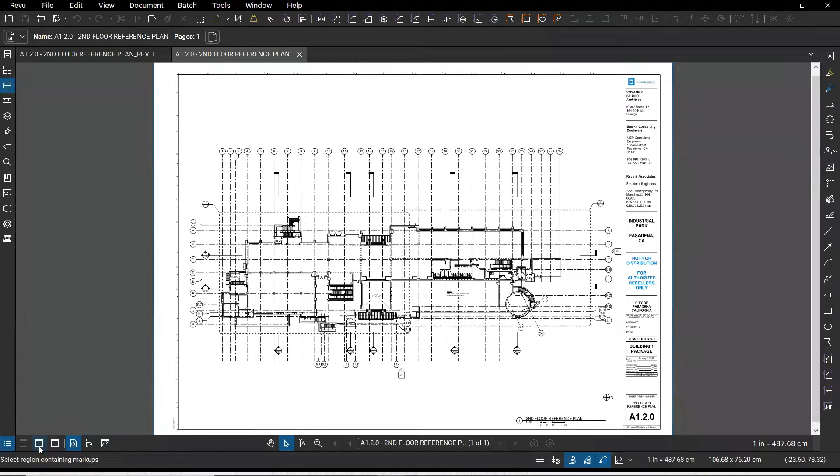If I go to view, you'll also see split vertical here, with the corresponding hotkey. As soon as I hit that, it'll put them on two separate screens, splitting the view. You can see here I'm actually on the same drawing in each one, so of course I'd want to use that tab so I'm looking at the two different drawings.

Now as I go around, I can do a bit of a comparison, but the best thing to do is make sure you synchronize the views. That way, when I change on one view, the other drawing will follow it. So there's synchronized view here, and if you have up your status bar, you may also see that command as well.

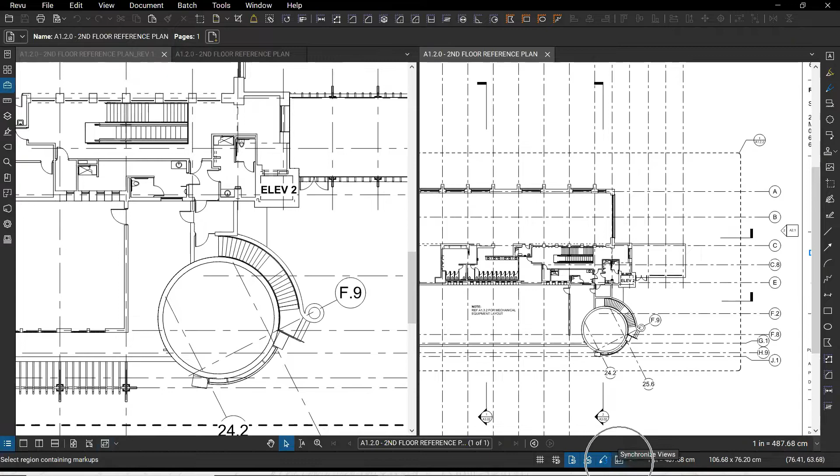Again, it's under the view tab, called synchronize views. Now wherever I zoom to on this screen, it takes me to that corresponding location. You can see how as I go around it's taking me to those same positions. I can see, for instance, I've got a door here where the original didn't have that door, so I can see some simple changes already.

I can come down and see that this one has the facade on it, where this one doesn't as well. So I can do that real simple comparison straight away. It's really good to do if you've obviously got a new update of a new drawing.

I'm going to close that window just by closing that, and I can actually overlay this. Now, the best way to talk about overlay is I like to compare it to when I was in the drafting office, where we used to have a light table, or you'd even occasionally hold two drawings up against a bright sunny window if they were the same but different revisions. I can get the computer to do that.

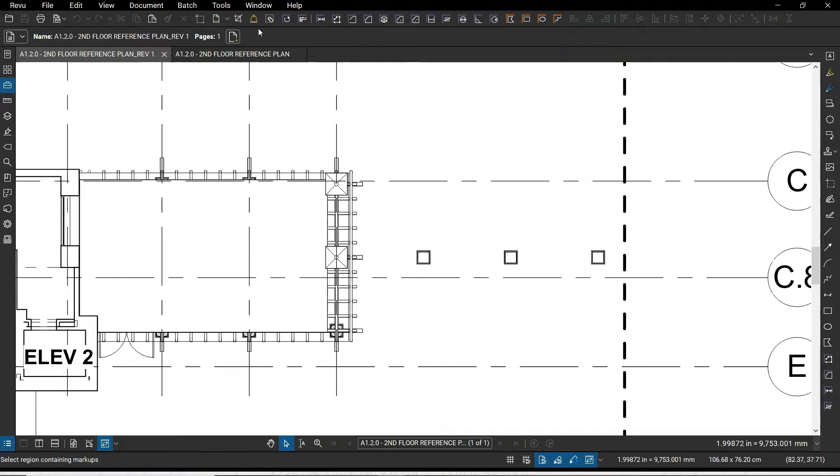So under the document tab - sorry, under the tools, no, let's go to - yeah, it was under document. So remember, whenever you're trying to do stuff to the document, it's under the document tab. If you're trying to do things with the view, it's under view.

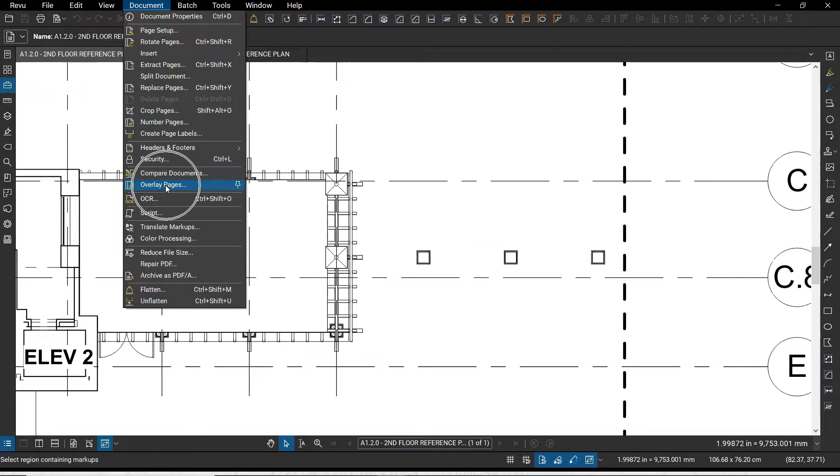So under document, you can see here I have overlay pages, so I can overlay those pages. You can see how it's going to put one drawing as red and the other one as green.

What I can do as well, if I didn't have the other file open, or even had a third revision I wanted to add in, I can add another file here. You can see that it's already sort of added the open file - that's what I always like to do, open them prior, so it's pre-populated that.

If I hit add here, I can go find another drawing, which I won't. I can modify these as well - change the color, opacity, or make a new layer, etc. Generally, this is all okay out of the box - you don't need to do it otherwise.

What you can do is compare regions of documents. So if you just have a little detail that's been updated, you can select a region and just overlay those two regions. Again, I don't really need to play with any of these settings.

Align points here - this is where if you had two drawings of a different size, say one printed on A3 and one on an A1 sheet, you can use align points to select three different points, which correspond, then pick the three identical points on the other drawing, allowing it to scale and overlay them. Quite a useful tool, especially if you're trying to just do one little corner detail rather than a whole drawing.

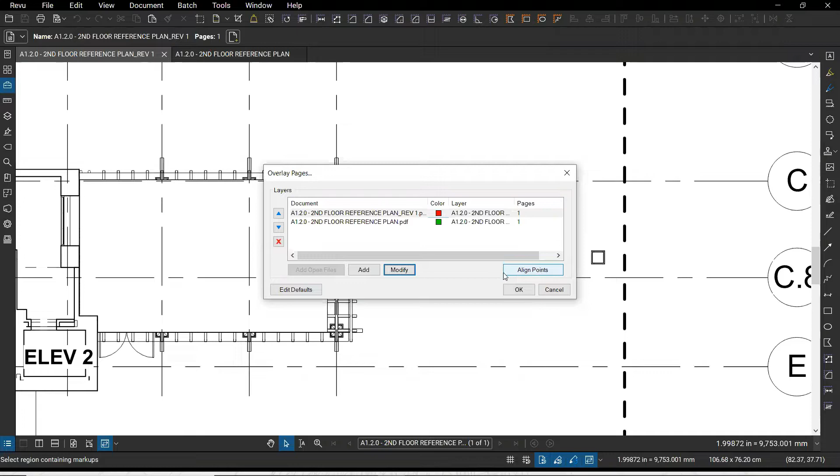I'm just going to hit OK. You'll see it creates a new drawing overlay, giving one the green color and one the red color. When both of them are together, you get pretty much a black, dark brownish color, so you can see everything that's the same.

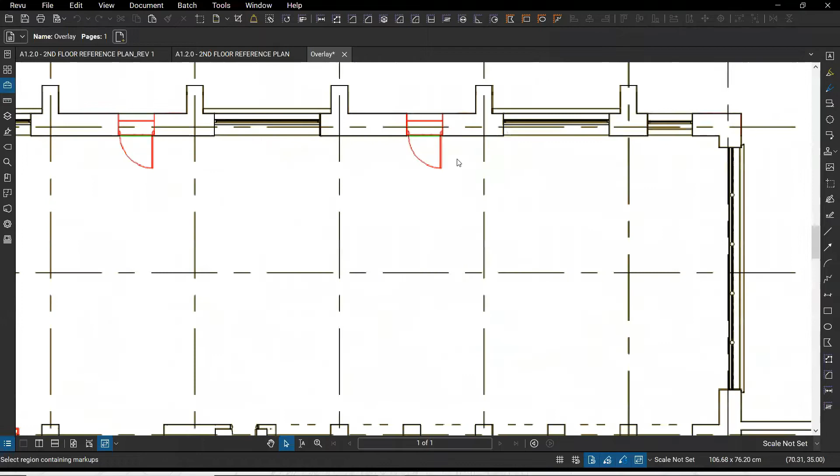You can see that door change straight away, and that facade I pointed out. I probably would have missed things like this door here, maybe this new wall, this mechanical penetration, etc. So you can see how it's very useful - all this steel framing at the front here was all additional on the second drawing as well.

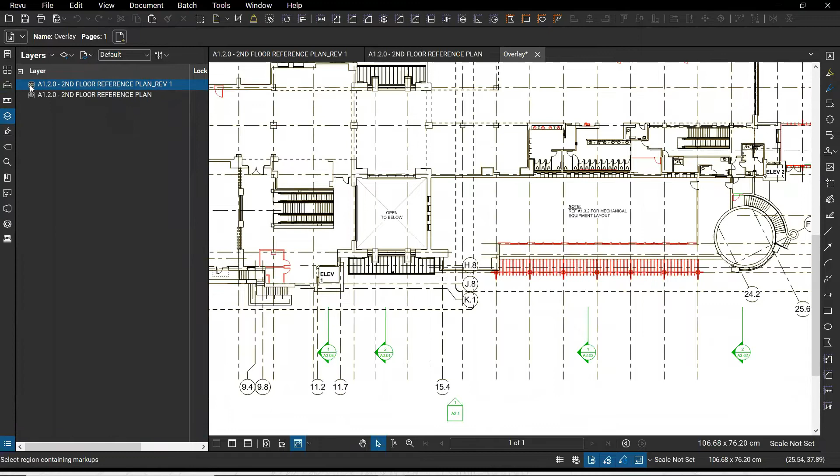Now it has created layers in that drawing. So if you go to your layers on the drawing panel, you can see that it's allocated a layer to each drawing. I can turn these layers on and off. So if I did just want to see the original plan, I can turn that off, which will highlight the first drawing, and do the opposite as well, getting the red drawing. So it's quite easy to see what's new and what's not. It's great if you get two different drawings from your consultants, clients, etc.

Makes it real easy. That's an overlay that can be saved as a file, and you can save it and send it as an overlay as well. I'm going to close that down.

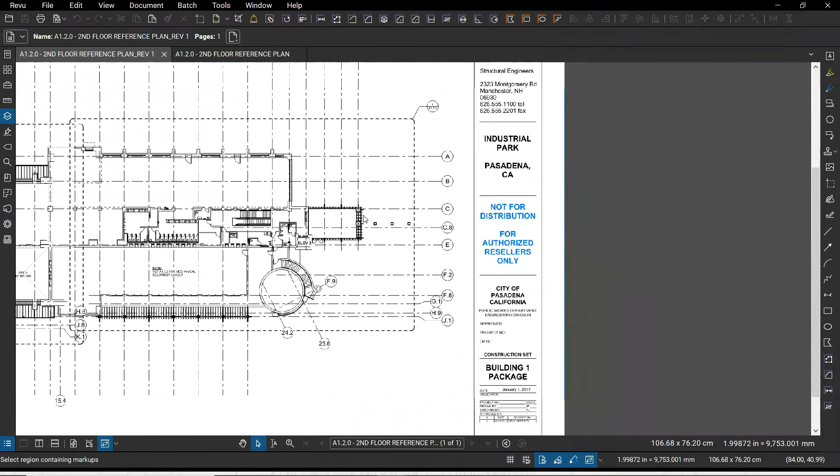There is another method we can use. We can use what's called a comparison. The comparison really uses the power of Bluebeam Revu to go through and actually highlight those changes. So I'm going to go back under our document tab, and you can see overlay here as well—we just did overlay. I'm going to do compare.

So we can do a comparison. Again, you can see because I've got those two drawings open, it has automatically populated document A, which is the revision, and document B, which is the older one. I'd like to make a note here that document A, revision 1, is the later document. I could use this manual alignment if the drawings didn't line up exactly, or if I wanted to just do a part of the drawing.

There are some comparison tools in here. Generally you play with these, you get a feel for what works for one project may not work best for another. You may need to play around to find the right settings for your particular project. You can do printed documents, the same printer, different printer, or scan documents. What these do is change these advanced settings to adjust the accuracy. As I change the comparison type, you can see things like the color sensitivity moving around a bit to give you the optimal result.

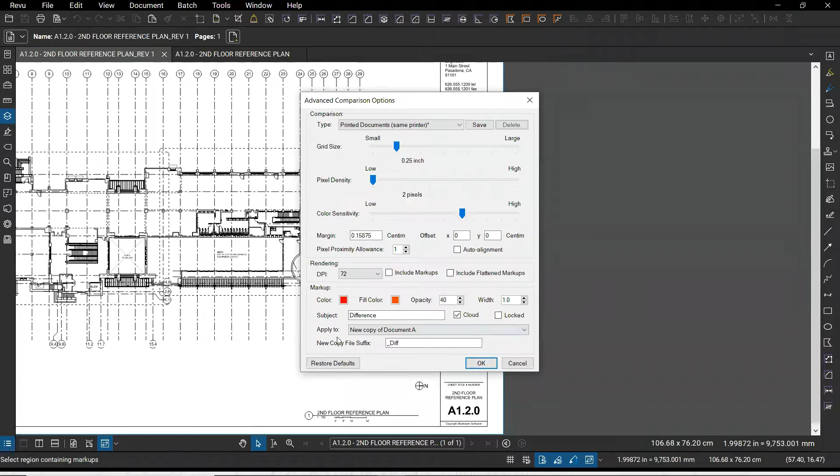I could flip these around, and like I said before, if I needed to point to a new document, I can use these three dots here to jump to another document if needed. It's always best to have the documents you're trying to compare already open—I think that's the best method to use. Hit OK.

We'll compare the documents. You can see it's actually activated that split view. I probably don't really need that, to be honest, so I can go back to one window by hitting this and going to unsplit.

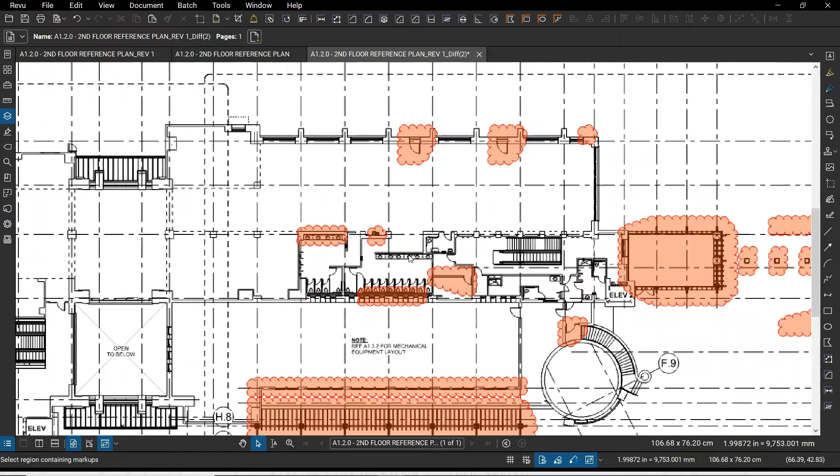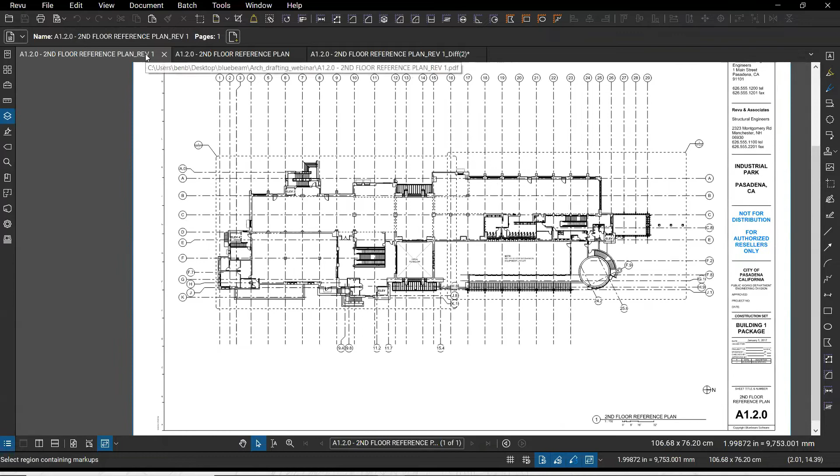You can see it's actually gone through and clouded the changes. Where the other method allocated a different color, this has gone through and clouded those changes. This is great if you've got a supplier or someone who sent you the latest revisions and hasn't clouded the drawings themselves. These are all the section marks—on the later one it didn't have the section marks, whereas the original drawing had all these section marks on it. Again, that's probably not a change as such, it's more just a drawing update, so it's not really relevant.

So I can simply select these clouds and go through and delete the ones that aren't really showing me a structural change to the drawings. I can delete out the clouds that aren't really part of the drawing—well, they're part of the drawing, but not part of the building as such.

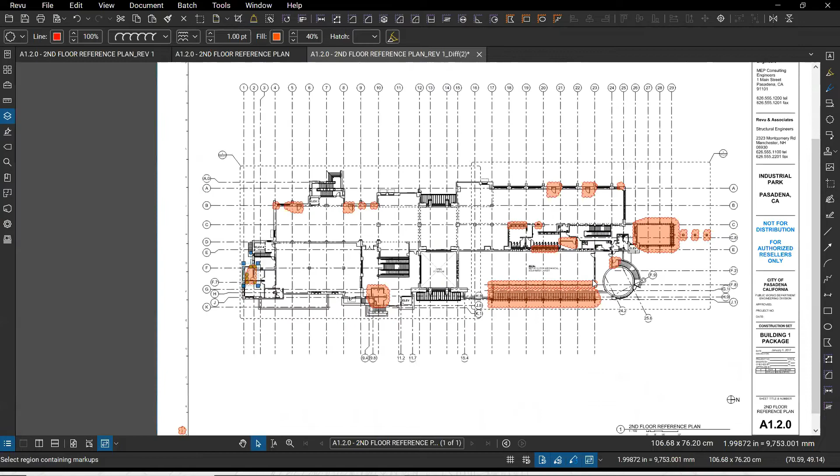So there you go, very quickly, I just fixed that up. I've got the drawing there with the differences. I can go through and make sure things like this door aren't going to get missed out on my variations, etc. It's quite clear what the changes are.

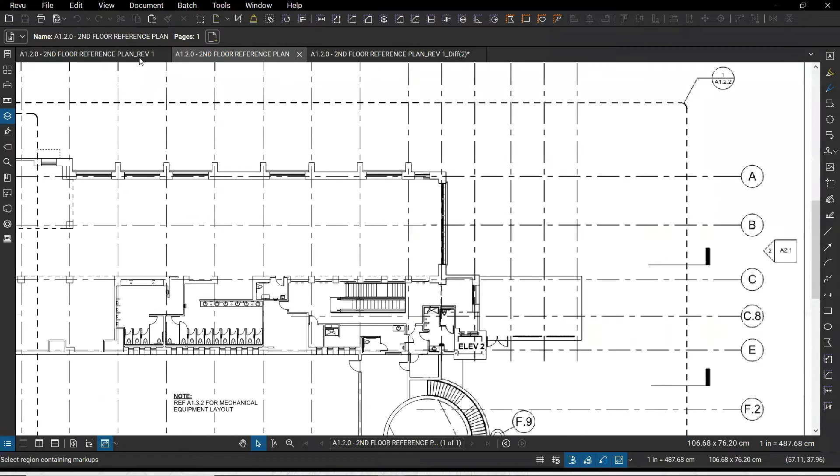Again, that sensitivity can be a little bit different. If I really looked at this corner here, you may find that there isn't a significant change. You can see on that one there, it looks sort of the same. And on this one, that line might have slightly changed, but it's actually not that big a change.

So again, I could probably delete that cloud out, for instance, and just have it on the major changes. So that's your comparison and overlay. Quite great features if you're really dealing with a lot of drawings. Again, you can save this as a separate PDF, etc., which I might do just in case someone asks a question and we want to go back to it.

So what I'm going to go through now is just the tool chest and profiles and how that works. You can see the tool chest here in my panel, and I've got sort of my tools set up. Got a few markups that I use here. I've also got some universal beams that I made up when we do sketch to scale, which I'm actually going to show today as well, how to set that up. And some flooring quantities, etc.

Now, this is a profile that I use quite commonly, but you may have someone who's just doing some estimating or doing drafting, etc. So we can change that profile and push that out to different people in our company just to make it more approachable. If someone's not going to use universal beams, it's probably not warranted to give them that in a tool set. So to change the persona, you can simply come under your Revu tab and go to the profiles.

Change to different ones or create a new one. You can see here that I've got one created for a client. And if I change that, you'll see that my tool chest will change and even all my toolbars change as well. So you can save the toolbars in it. You can see that it's changed the different profile and I've got a lot more tools that I sort of didn't have before. So this makes it very easy.

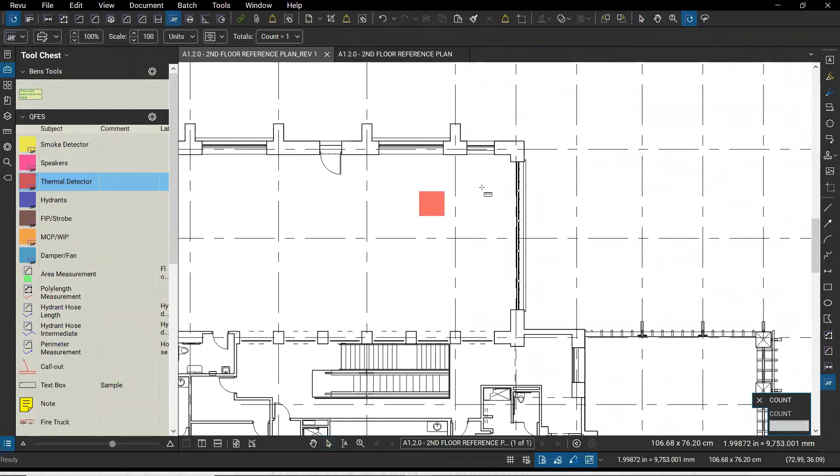If someone's doing like a fire thing, I can put on the thermal detectors, etc., just by dragging and dropping, and put all these quantities on to get my quantities out. So that's a different profile. I'm going to show you how to now make a tool chest and how to put an item into that tool chest. I will just flip back to my profile.

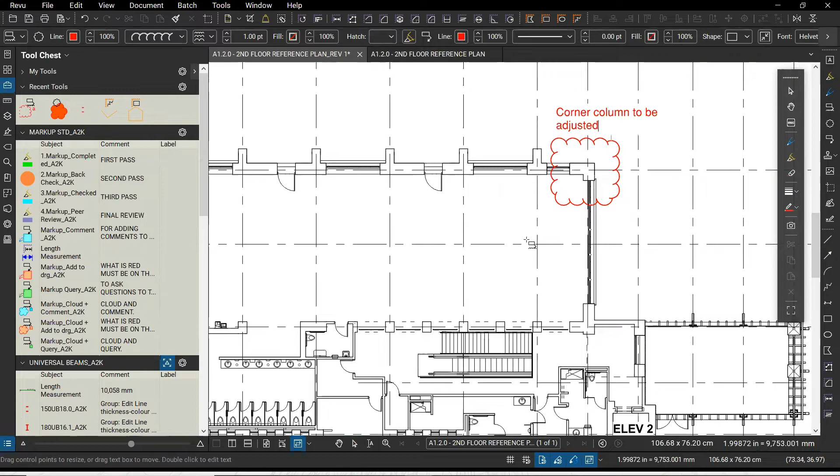And what I'm going to do is just a simple markup on this door here. So I'm not going to do the drafting yet, I'll just do a simple markup to keep it simple. Go to my tools and markup and just create a simple Cloud Plus. Cloud Plus is always a good one to use. I can do an area around that and it will also give me the call out as well here. And I can put corner column to be adjusted. Now, I can manipulate this and change all the settings in it.

So I generally like to use a bit of a fill on it, it stands out a bit nicer. I probably like to avoid red unless it's a real change, you know what I mean? So I might go to like a dark sort of bluish color. I'll do the same for the line as well, which I didn't match those colors exactly.

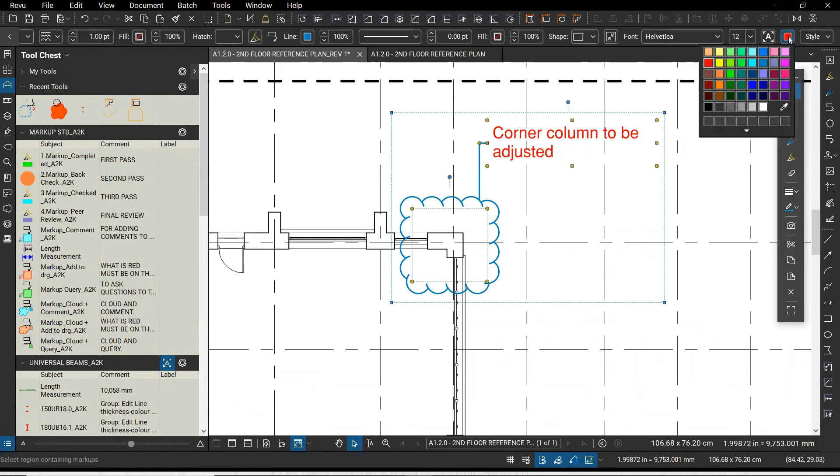And I can do the same with my text. So you'll see all these settings up here. These settings as well are all available under the properties. So if you go to properties here, you get all these same settings. It's generally, you get a bit more subtlety here. So it's a little bit easier to change in the properties, I suppose, rather than using the actual properties bar where you have to slide it across if there's a few things.

I generally like to put a fill on it as well, and always put a bit of a shade on that, like maybe 20%, which will really just make it pop a little bit better.

Now, if I wanted someone to use that same sort of markup, obviously I want to save that into a tool set so someone else can grab that straight away and do it. So first of all, I need to create a new tool set. If I go under the tools chest here, you'll see right down the bottom, I can manage my tool sets.

So I'm going to create a new tool set. I'm going to simply add a new one and give it a name. I'm just going to call this sketch to scale, so I can show how we can use this in a scale drawing as well.

I am creating a new one. You could path it to an existing one on your network, which you may want to share with other people, but I'm just going to create a new one from scratch. I do want to display it, but I don't need to show it in all profiles. I'm going to just add it into this one profile, as I described with the profiles. If you don't want everyone to use it, or it's not necessary for all your profiles to have it, I would not tick this - I'd leave it off by default.

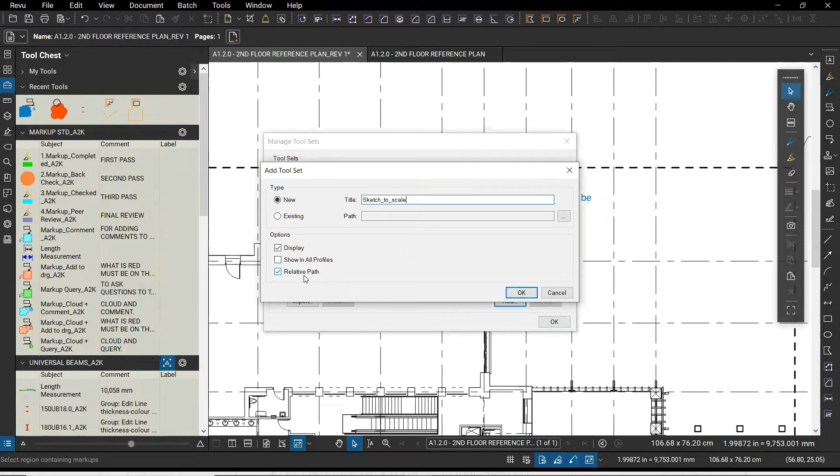Relative path just means if you send it to someone, it will find it easily because it's got the relative path. Hit OK, and this can save where you want it to save. I'm just going to save it in my roaming folder, where all my other ones go. Look at that, already exists - let's override it.

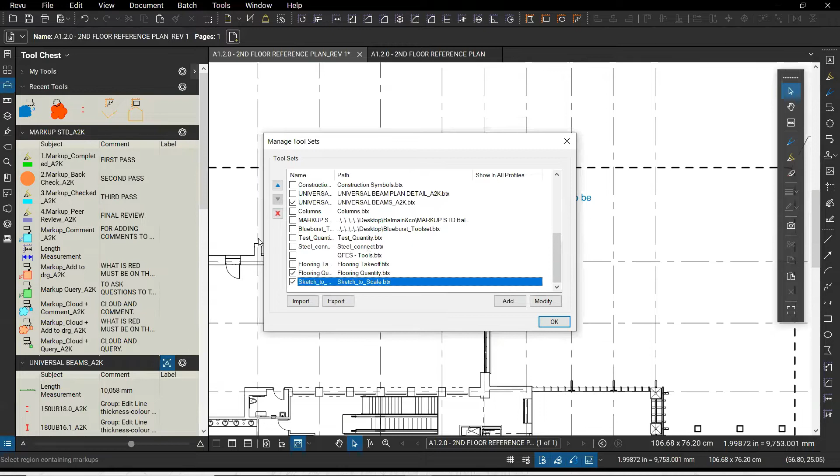You'll see now these tick boxes determine if it's displayed here in your current tool chest. So if I turned on my test markups, for instance, that would become available here. If I turn it off, it'll disappear. Whenever you create a new one, it will always sit at the bottom. You can move it up to the top just by hitting these arrows, and you'll see eventually it'll get up to where it's meant to be.

Hit OK. To add something into your tool chest is quite simple - there's generally three ways to do it. One mantra I have when working with Bluebeam a lot is: if in doubt, right click it out. So make sure that if you're wondering what to do, select it and hit right click, and that will give you generally all the options available for it. You can cut, copy, paste, format painter, change the colors, control points, etc.

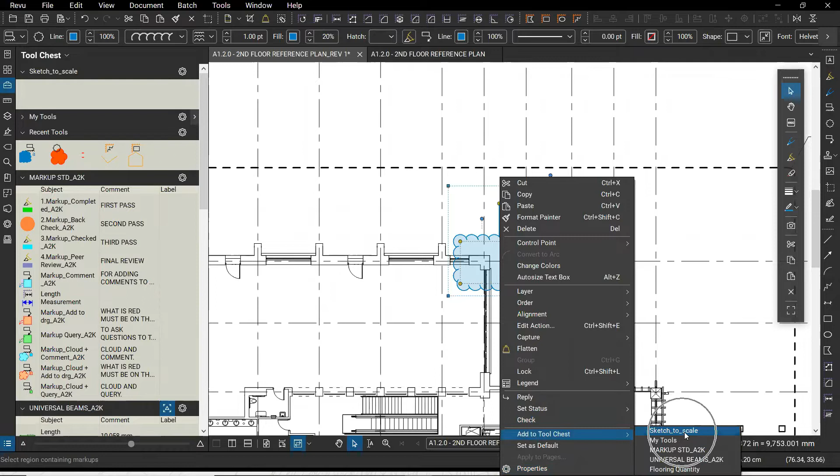You can also add it into a legend, etc. I do want to add it to my tool chest. You'll notice here, out of the multitude of tool chests I had available, it is only seeing the 4 or 5 that I actually have turned on - you can only add it to an open tool chest or tool set. Tool chest is the collection of tool sets. Add to tool chest, add it to my sketch to scale, and you'll see it jump in there.

I can also select it and go to the properties, and you'll see right down the bottom in the properties we have that same add to tool chest option. Again, I could select that same one here. The other way to add it in is that it will remember the last things you did, so you can see in recent tools I have the original cloud that we did during the overlay, and then I have my cloud plus that I just created.

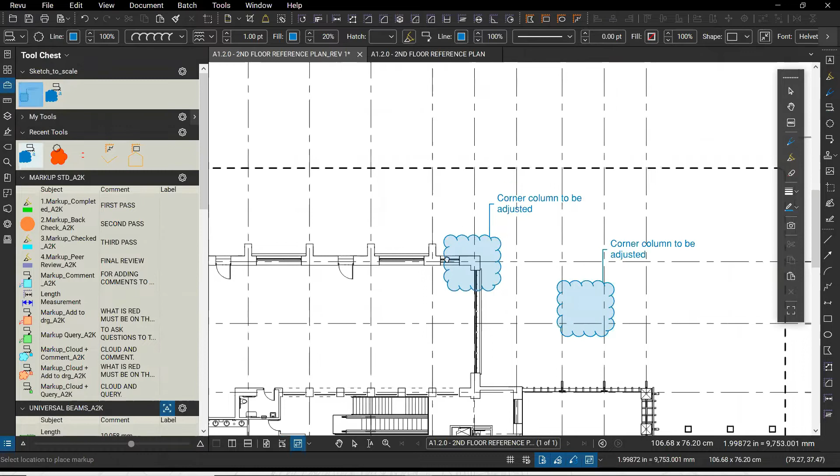So I can simply select it from my recent tools and drag and drop it into my sketch to scale. You'll notice here that the 2 icons are different even though it's the same thing - the original one is what we call drawings mode, and this is what we call properties mode. If I bring this one straight on, you'll see it's exactly the same. If I wanted it to look slightly different, I would need to activate the grips and drag this around to that new area, and then change the note accordingly.

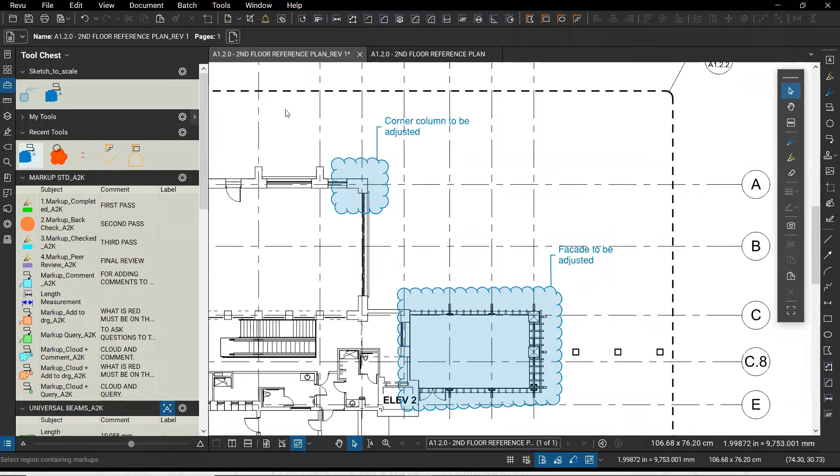You can see that still works. There's nothing really wrong with that. Some people don't mind having it like that. This is what we call properties mode, where it will grab the properties of that, but it won't be restricted to the size it was before.

If I select this one, I can select that whole circle area, and you can see how it's really putting it in from scratch. So, facade to be adjusted. You can see how straight away it's grabbed the properties of it, but hasn't grabbed the type of it.

So you can see they've gone in differently here. Those icons might be a bit small or a bit big. You can use this slider at the bottom to make them bigger or resize them as you like. I try to just keep it in the middle, but it's up to you.

To change them from drawings to properties mode, you can simply double click. If I double click on this icon here, it'll change to that one. And if I double click on this one, it'll change to what it was as well. So simply by double clicking, I can change it from drawings mode to properties mode or vice versa. Again, by right clicking, I can change it to drawing mode or properties mode from inside the tool chest.

There are also icon tool chests where these show more detail. Again, that is in the settings of that tool set. So I could change the settings to actually show detail rather than the symbol. If I change it to detail, you'll see how it gives those details.

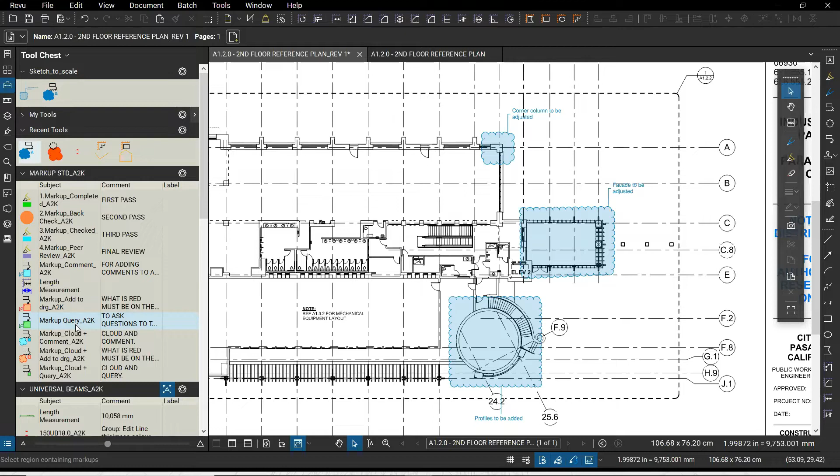Again, it's up to you. Some people don't mind the symbols, they know what they are, but I always find it's more useful to have a bit of a description in there. So that's quite important. The properties and drawings mode will really change the way you use Bluebeam if you weren't aware of that. So I'm going to go through sketch to scale and really show how that works.

I'm going to open up a different drawing. I do have it recently open. So if I go to file, I get all my recent documents here and I can open the one I wanted, which was this one. So this is a drawing here.

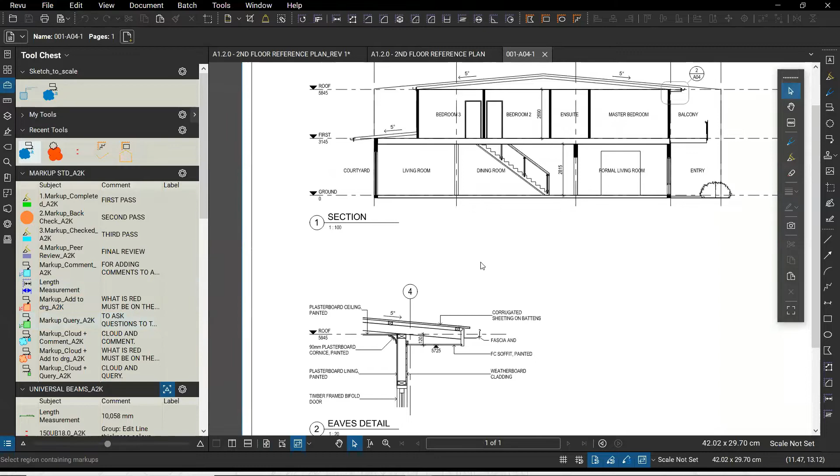Just one thing to note, the previous drawings I used did have a scale set. You can see how 1 measured inch would be 487 centimeters. This drawing, the one I've just opened, does not have a scale set. Scale is not set. The first thing you should always do is set the scale.

Whenever you go to do a distance, if you wanted to measure something off, as soon as I went to do a distance, it would come up and ask me straight away to set the scale. If you're only doing clouds, it's not going to ask you to set that scale. So we do need to set the scale before we do any drafting as such.

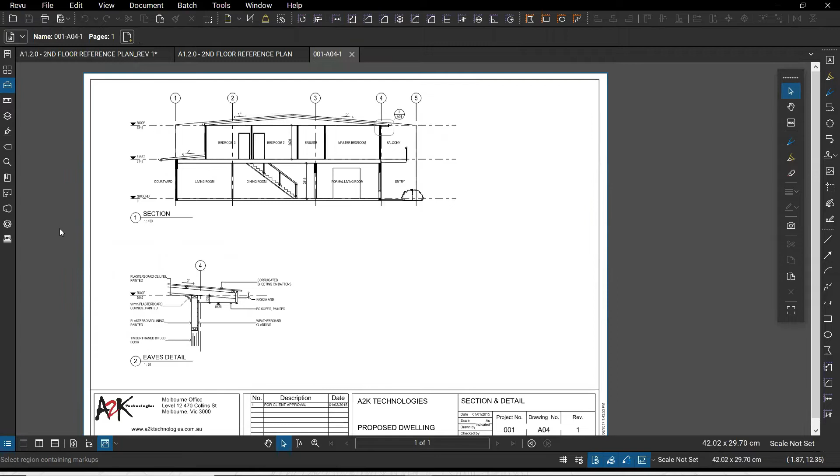The first thing I'm going to do is, you can do this under the measurements tab, under the measurements panel, or I can go under the tools tab and go to measure and set the scale here. You can see it does have the corresponding icons in my toolbar across the top.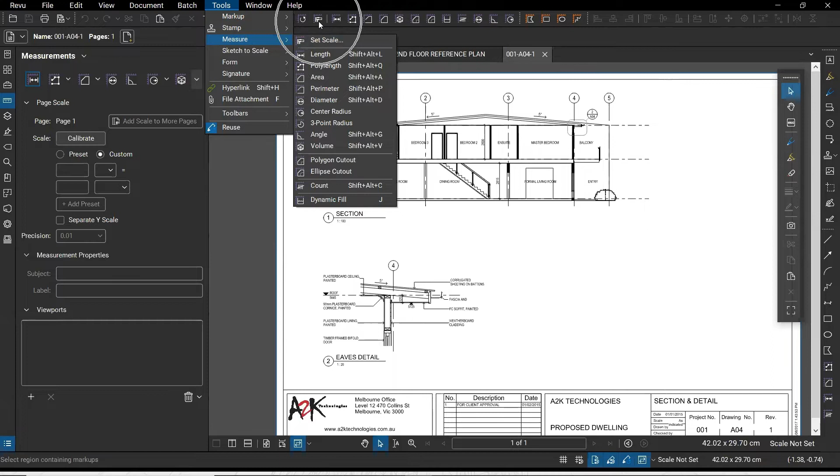I'm going to set the scale. So let's set the scale on the current document. Again, I can set that on pages, etc. Just use my presets and 1 to 100. This may not be the right scale. Occasionally you'll have A1 drawings sent through in an A3 format, so the scale may be a little bit off.

If that's the case, I recommend using the custom option and coming here to actually calibrate the drawing. When you use calibrate, it will ask you to select 2 points of a known distance. I'll just close that. I can see I've got a height here of the building, so I can pick a point here, make sure that's coming directly up, and select the end point of that line. And I can see that needs to be 5.845 meters.

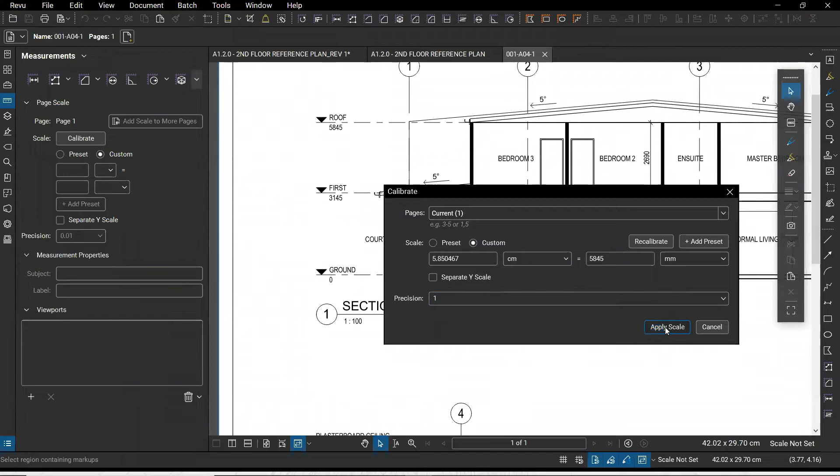Again, if I wanted that in millimeters, I can simply change this and you'll see how that will update accordingly. If you're doing millimeters, you probably only need your precision to the nearest millimeter, whereas in meters, I would have it to 0.01. Apply that scale, and that scale has now been applied to that drawing.

Now, I do have a toolbar that I've already used, so I'm going to use that as well, and then I'll show you how to create your own. You can see this one. Generally on the tool sets they don't have sketch to scale on it. This little triangle here denotes that it's a sketch to scale tool set.

Another thing you'll note is that this is a 1 to 100 section, and this detail down here is a 1 to 20 detail, so I have a different scale on the drawing. To do a different scale on the drawing, again, it's under the measurements panel.

We can actually add a viewport down here, so I can go to plus to add that viewport, select a region to define that viewport. Now, you may not want to show these messages again, you may have it turned off. If ever you're confused what it's asking for, do follow your status bar here. You can see that it's saying the same thing, select the region containing markups. So if you don't have this, or choose not to show that again, do make sure you're following your status bar.

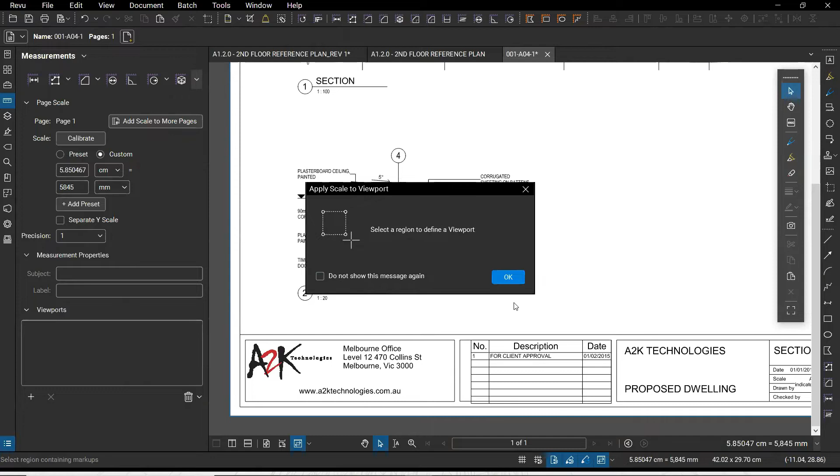I can select a rectangle over that 1 to 20 area, apply that scale of 1 to 20, and hit apply.

Now, if I do use this sketch to scale toolset, you can see that it's activated because it has that blue highlight on it. I can deactivate that and that will just turn it into a normal sort of toolset. It still does have the scale embedded into it, but it's not activated. I would want to make sure that's activated.

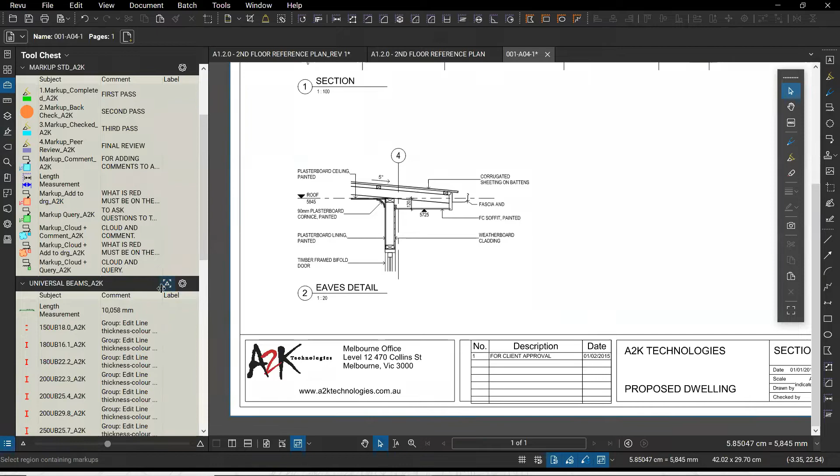And if I grabbed, for instance, a 410 UB, selected and placed that in my 1 to 100, you can see if I go and place that same beam in my 1 to 20 detail, that it will go up in size correspondingly. So you can see as soon as I go on that blue viewport area, it's going to allow that to be put in at the right scale as well.

Like I was saying, if I did deactivate that, you would find that it's the same size throughout. So it will be the same size here and the same size here. Where if I have it activated, it will go up in size.

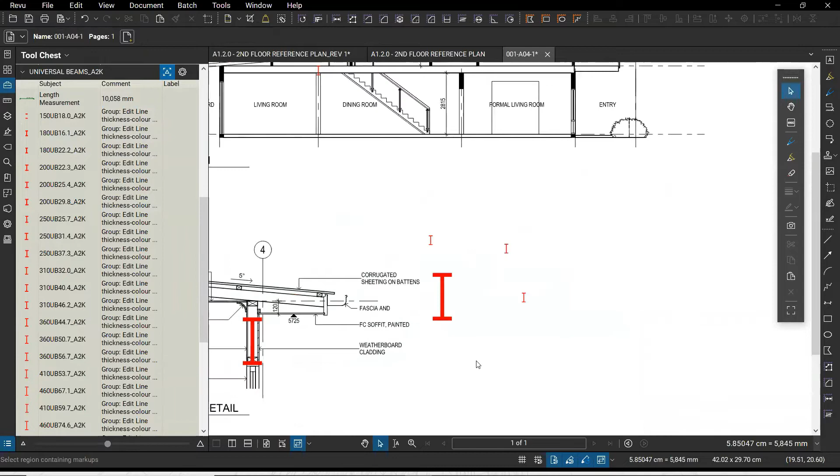Now, how do I create a sketch to scale toolset? It's just a matter of creating that sketch to scale tool set, which I've already done from before, just using that same tool set we just created.

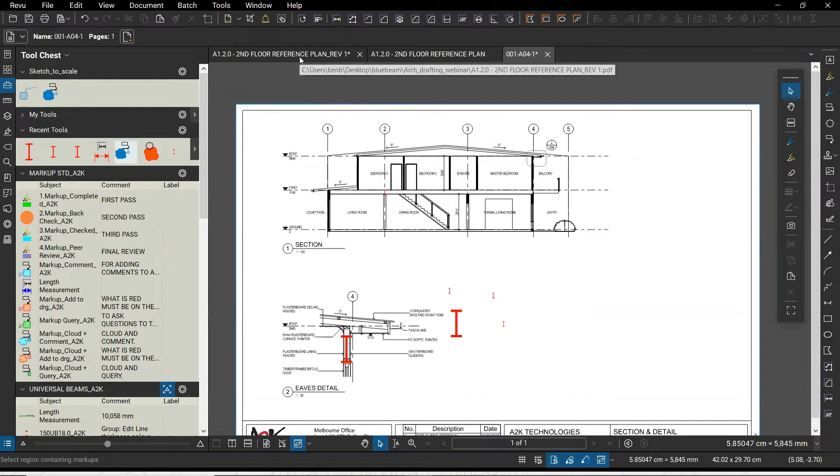First of all, I want to actually draw my item, so let's draw a similar sort of structural beam. I know that this is sort of on architects. I could do it with a toilet or something, I suppose, from the other one. I might do that as well, add a toilet in, to really show how to get these drawings out quite quickly. So I'm just going to draw a simple line.

I probably want to draw a sketch to scale line so that I can get those distances exactly right. So the sketch to scale is under your tools, and you will see sketch to scale here. You can see how it's got those 4 tools: a polyline, ellipse, rectangle, and polygon.

I do have it in my toolbar here. Again, I have just gone to toolbar and just turned on my sketch to scale, so you can see it's the sketch one. If I turn that off, you can see it's disappearing, so that's it through there. If you go to toolbars and turn it on, it will become a toolbar.

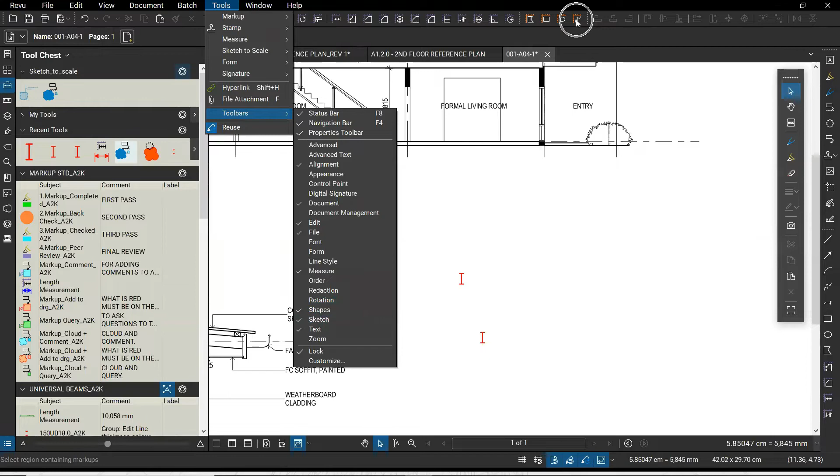I'm going to just draw a line. Let's draw it at 1 to 100. Trying to think of something else to draw rather than a structural beam - do forgive me, let's just draw another structural beam. So I know from that point, it's 200 mils across, so I can actually type in 200 and hit enter twice to finish that off.

Again, I could change the color of the line, etc. I am just going to leave it as is. I might draw another line from the middle, and I'll draw that down, let's say 300. And that's that line. Just to show how we can change some things, I might just make that green and maybe make it a little bit thinner as well.

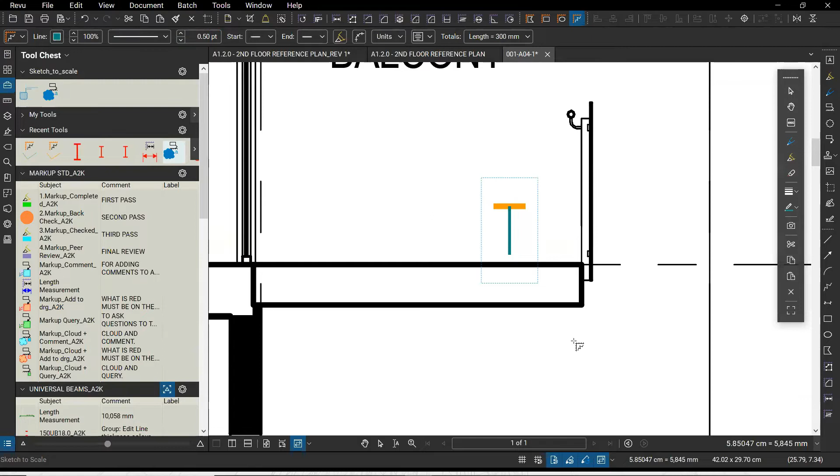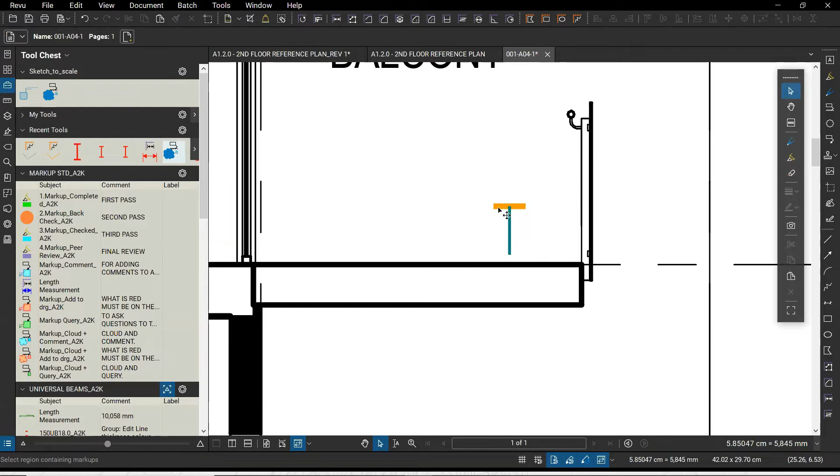And again, I can actually use my snaps. So I can use my select here to select that line. And as long as I'm snapping to both the content and the markup, I can copy that by holding control down. Picking the wrong line there, but let's make sure we pick the right one. By holding control, I can move that, and you can see how it's snapping to that line straight away, snapping to the content and the markup, drawing it directly vertically down.

And that's my scale beam as such, or scale chair, whatever you wanted to do. Again, simply select it. Always a good idea if you have multiple lines like that to create a group - it makes it work a little cleaner and keeps them together better. So I can right click, select them all, make sure I select everything, right click on the item, and group it.

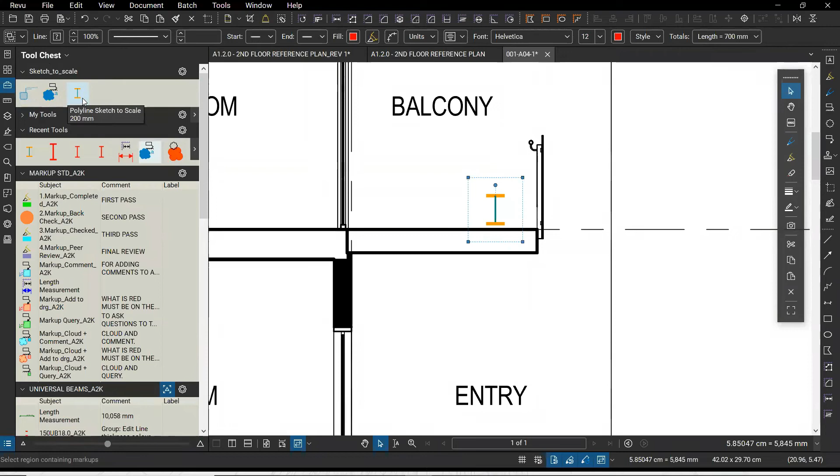And then I can also right click again and add it to my tool chest, add it to my sketch to scale one here. At the moment it's not a sketch to scale tool set, so if I selected it from here, it's going to place the same item there. What I need to do is come to the properties and change this, or set the scale of that tool set.

So I'll go to set scale. Again, set that at my 1 to 100. I could use the preset here - I can see it's that 1 centimeter to 100 anyway, so I'm just going to apply that scale it has in there. Just to show how it doesn't change, since it's 1 to 100 anyway, I might just go to preset and use the 1 to 100 and hit apply. You can see now that that has applied that sketch to scale symbol to that tool set.

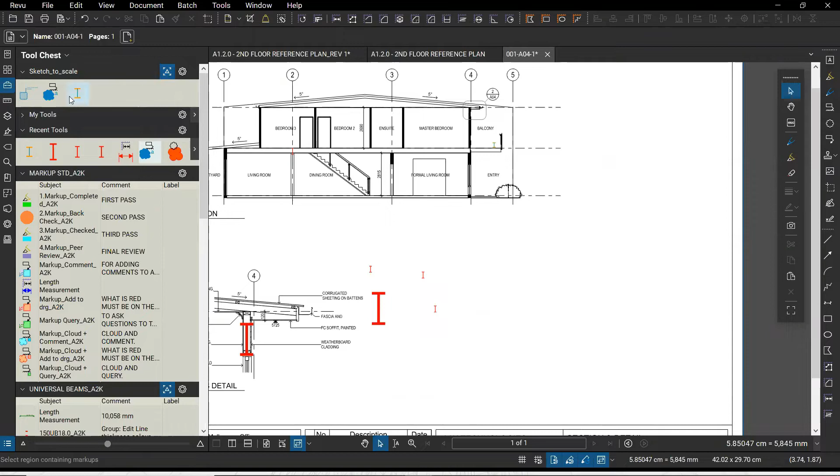Now if I grab that from there, it will be the same size on my 1 to 100. And if I drag that down and put that in my 1 to 20 detail, you can see how it has jumped up accordingly in size. So that's the simple way to be able to create these sketch to scale tool sets.

Some of the other drafting tips and tricks that you'll use a fair bit will be your alignment tools. These are great if you're trying to do some framing, and you can do the same thing with toilets, etc. So for instance, if I come in here, or even that sink, if I wanted to add that in, I can see that that does have a scale here, so I can grab that from there as well.

So what I could do is grab a snapshot of that. G is the hotkey for snapshot - it is under your view. Snapshot is under edit and snapshot here. It does have the hotkey of G, probably one of the ones I use a fair bit, so I know it off the top of my head. So G, or snapshot, and I can snapshot that sink.

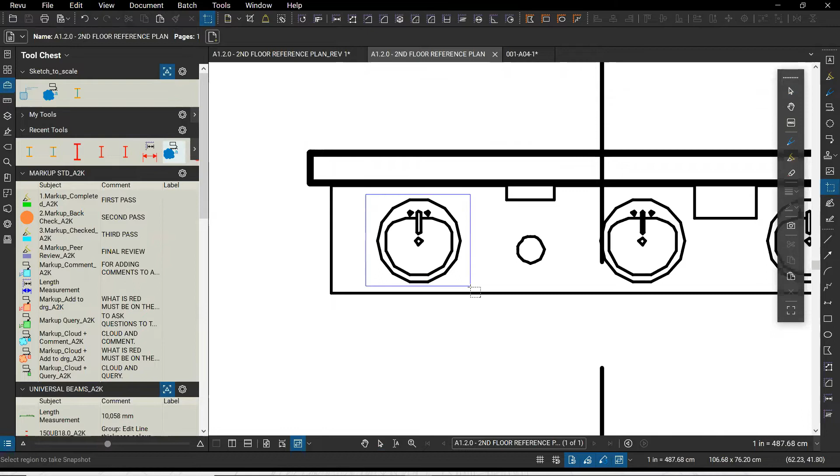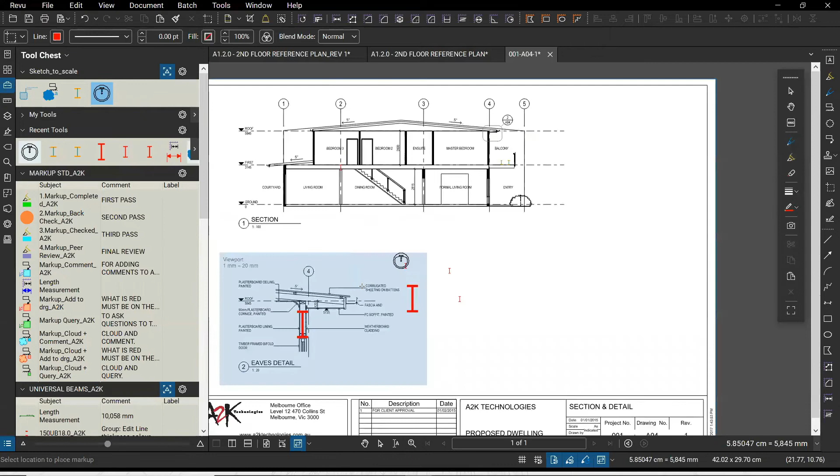You'll see again, as I place that, if I hit my Control V, it will place it as a markup. I can see that's in my recent tools, and I could drag and drop that as well into my sketch to scale tool set. Again, you can see that if I drop it in, it's going to be at that 1 to 100 scale on this drawing, and if I drop it into here, again it goes up in size. Quite useful if you were doing a lot of drawings and dragging, dropping toilets or room layouts, etc. It would be a great idea to have a tool set of all the common items you place, and then you can simply drag and drop and create your drawing quite quickly.

A few of the tools that I like to use are the alignment tools. Funnily enough, these aren't really anywhere under our sketch to scale, etc. They're just not really here, so they are a little bit difficult to find. In Revu 20, under the help, there is find tools and commands, which is quite a good thing to use. So here I could just simply start to type in align, for instance, and you can see that all those options become available.

These are ones I use a fair bit, especially when I'm doing that design drafting. There's also distribute - you can distribute items vertically or horizontally. So they are tools that I like to use that aren't really in the menu here. You can see that I have added that toolbar up the top along here.

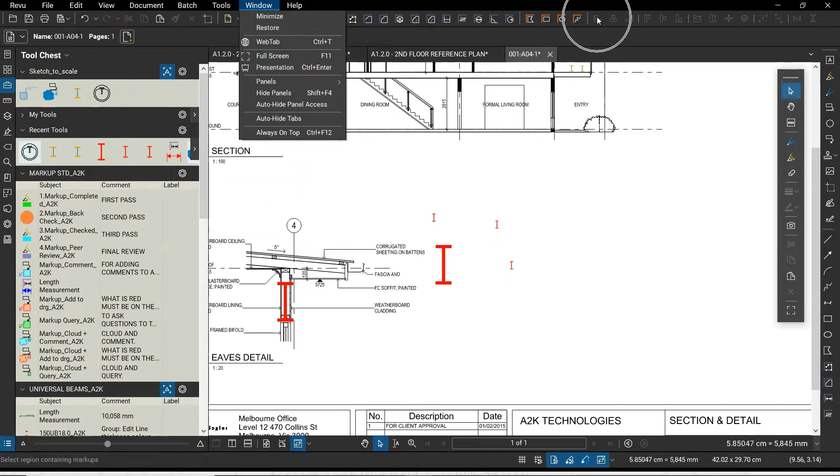So that's where I could go to tools and toolbars, and you can see there is an alignment toolbar, which is quite useful. This is where I could do some steel framing. So if I had a beam there and wanted to put, say, 8 beams evenly spaced along the top of this dining room, what I can do is copy the first and last one.

Again, I can hold shift. If I hold shift as I copy it, so control to copy and then shift, you can see how it will copy that in a straight line, and I can place it like such. It didn't really do a straight line, did it? I think because I've got so many snaps on.

If I did turn my snap to content and snap to markup off, it would copy that across in a straight line. It's because there are a lot of intersecting points around here, obviously trying to pick the top of the line or the perpendicular, etc. So I'm going to put my 8 beams just to show you as well. If I was a bit sloppy, I'm holding control, selecting it and then holding control to copy it and then just placing it.

So control to copy, or don't hold control - I want 8 beams, I said. So 1, 2, 3, 4, 5, 6, 7, and one more. You can see that I have them all a bit out of sorts. Obviously you'd want to hold shift down to make sure they all stay in a line, but I can select all of them.

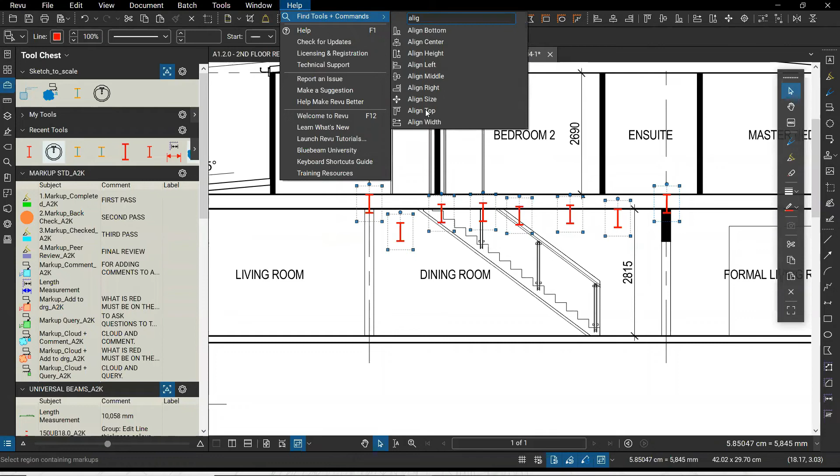I can align these to the top and they will automatically all align to that position. You can see that my spacing is out - these two are clearly closer than these two at the end. So that's where I could use my distribute horizontally command to distribute them between those 2 points. Now I've got those beams all evenly spaced at that position.

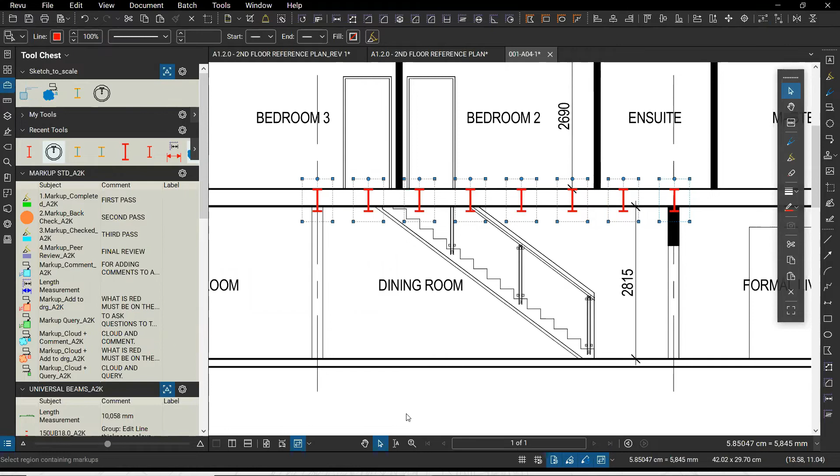If I wanted to evenly space them along the top of the ceiling of the dining room over a particular distance, say if you were trying to make up a framing plan, you can actually use your line, draw that line to scale and then snap to that. So for instance, if I use that polyline sketch to scale, select a point.

Remember in here I do have that rotation shift, again to make sure it stays straight at 90 degrees. I could put in 7 meters, for instance, and hit enter twice. Why do you hit enter twice? If I do hit it once, it will give me the end of that line and it will continue - it is a polyline.

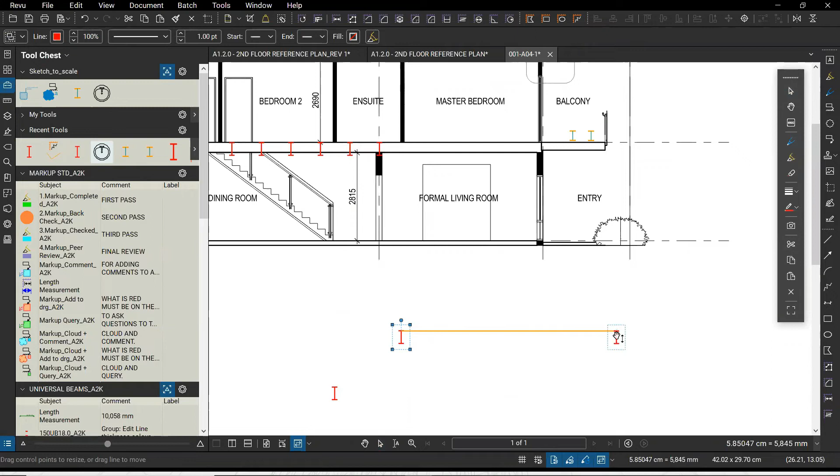Again, I could select this beam and move it. You will see how it's snapping to the markup, so I can snap it right to that line. And again, hold control, and you can see how I can snap it right to that endpoint. And then I can do that same thing to create those 7 beams.

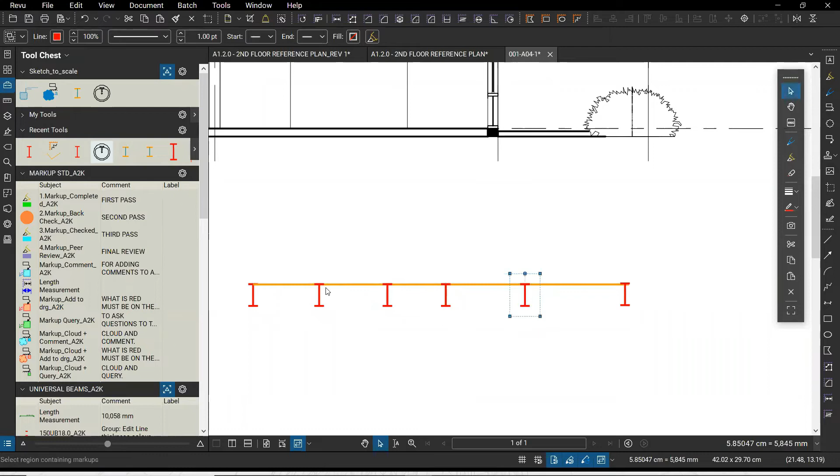Let's create that many, and select them all. Deselect the line by holding shift again. Good idea to make sure they're all aligned to top - you can see that, drop that one down a little bit. Then distribute them horizontally. That's how I can do a very accurate sketch to scale.

So that's sketch to scale, quite a good thing to use. There's all sorts of flips as well, so you can rotate.

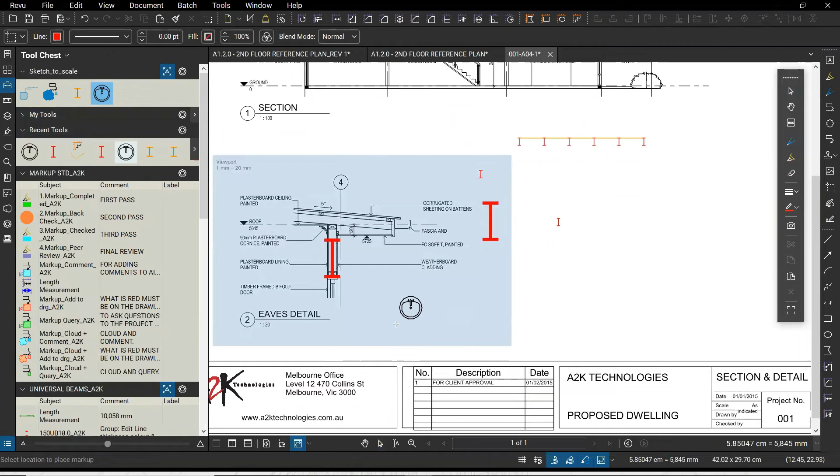If I bring that sink in, let's drop that on - you can rotate, there's a rotate at the top here. You can see that if it's one of those things, the more I zoom in, the smaller it gets. You can see how I could rotate that 90 degrees, or even 60 degrees if I wanted to. There's all those little tricks in it.

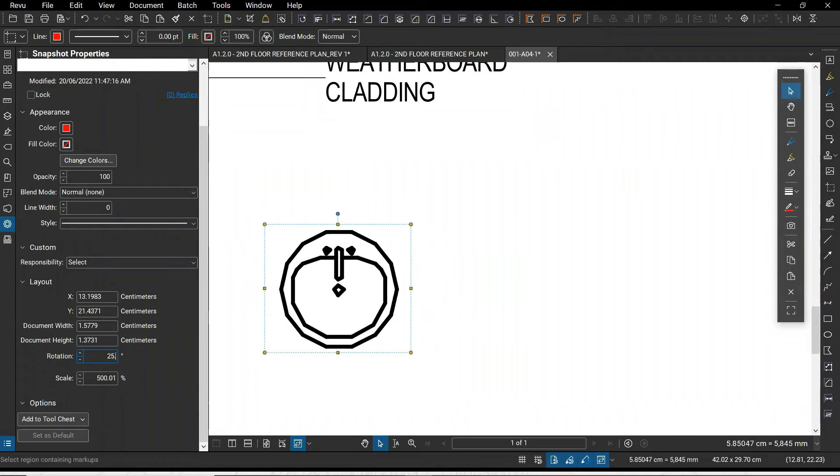You can actually rotate that accurately as well in the properties. If I go into the properties after I drop that sink in, you'll see the rotation down here, and this is where you could easily get that. NASA's in the chat asking about grids - so if you had a grid at 25.3 degrees or something, you could simply put that 25.3 into the rotation and hit enter, and you'd get it exactly accurately.

There's also mirror, like flip horizontal - so I could flip that. That's probably not the best example, but you can see how I can flip it. But I probably wouldn't be flipping sinks, I'd probably just be using the rotation.

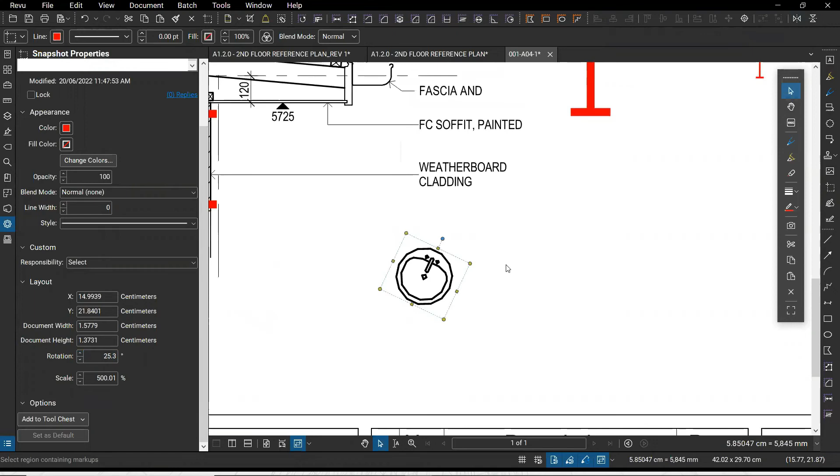But if you had a room layout, coming at it from that real architectural point of view, you could open up a room and redesign it quite quickly. Going to a plan I've got, opening it - if I wanted to flip that laundry and toilet room, I could do my snapshot, edit, snapshot, grab that whole room, paste it back in, and if I really wanted to flip it, I could select it.

Things like this, if you were doing real room design - another thing you might want to do is flatten it, because as soon as I flip it, the issue is going to be that it flips all the text as well. So to avoid that, I'd actually flatten this to the item so I can select it and flatten it.

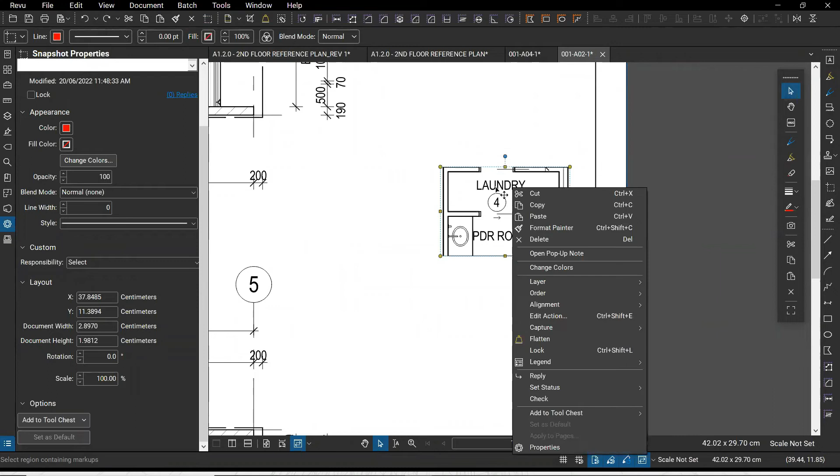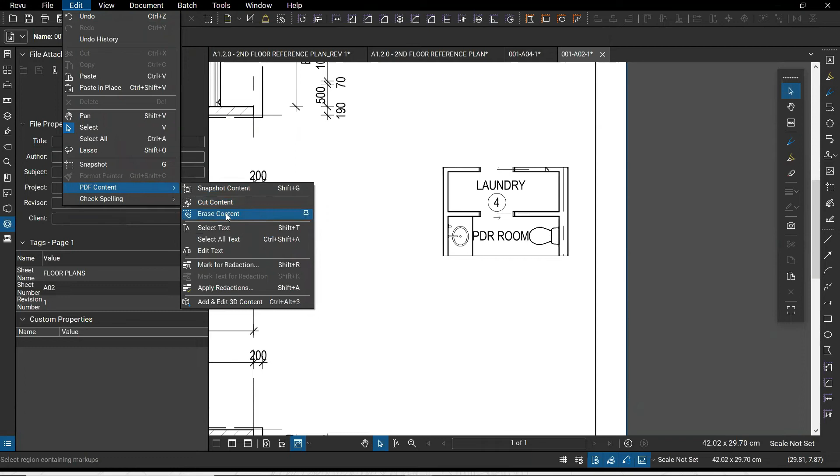Once I flatten the item, I can start to take out the content. I can come to edit - now that this is part of the PDF, you can see I can't actually move or select it anymore. I can come into edit, go to the PDF content, and start to erase that content, so I can come here and erase that text.

It might be a good idea to take snapshots of those items. So I could snapshot that text, paste it in, and snapshot that text as well. I'd want to be a bit more careful not to grab the edge of the line, but you can see I've got that text out, and I can come in, edit the content, and erase that content now.

I want to make sure I get rid of the circle as well, zoom in and get rid of that powder room label. And there you go - I've got that, which again I can grab with a snapshot and paste back in.

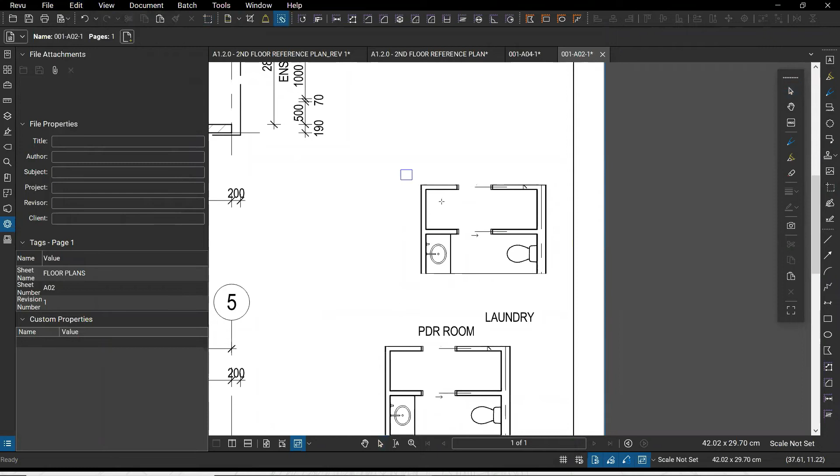Now I can move it - obviously I don't want that content where it is anymore, so come in, edit, and erase that content again, and erase that whole old room. Now I can select this and flip it vertically so it's nice and obvious.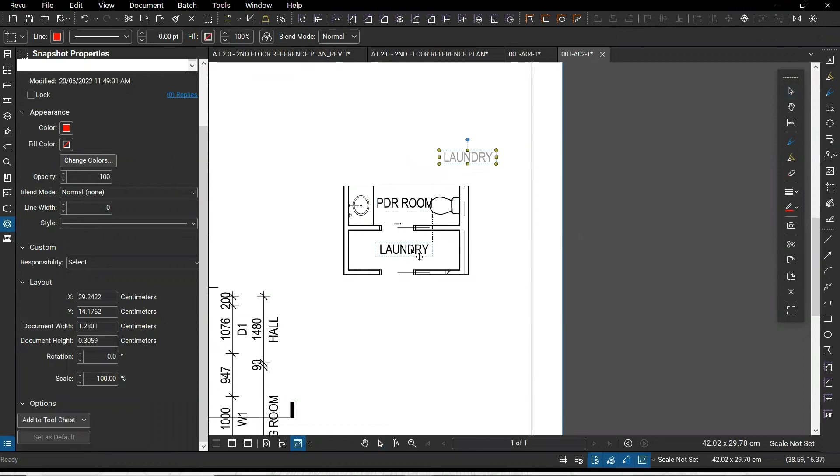So you can see now I've put the powder room on the north side instead. Then select my text, place that back in, and place in my laundry - you can see very quickly how I've created a new orientation for that item without having to reinvent the wheel. It's good that the powder room text is pretty much too big for the powder room, but yeah, the joys of drafting.

So that's it there. We're getting a bit tight on time - I've only got 10 minutes, and I'm meant to show a bit of markup list management as well, and how to create summary reports.

I'll probably just open up a quick PDF that I've prepared earlier - hopefully I can find something.

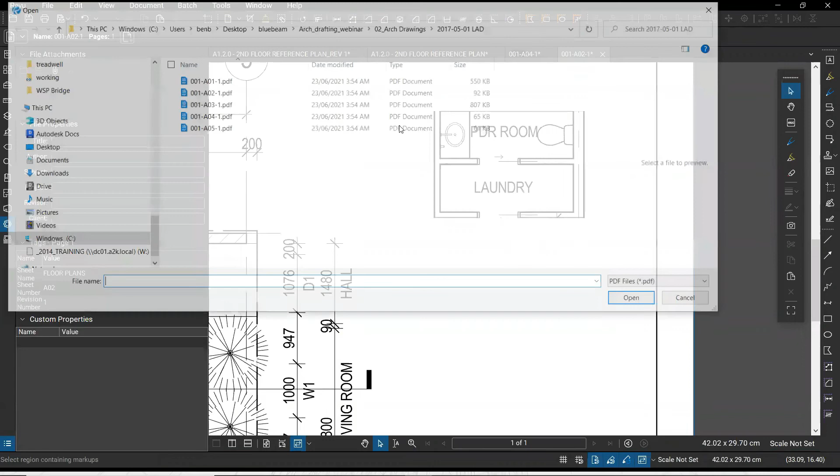I've got one here with a fair few markups on it. I've done some room markups, etc.

I know that this isn't a quantities presentation, but this is quantities. Anything I do is constantly being tracked in the markups list. You can see from that initial one here that the markups list down the bottom shows those items have been added in, all those beams I've added, and all those sketched to scale. You can see that it's counted the beams as well, and I've got all that information about it, all that metadata - who created it, how long those lines were, etc.

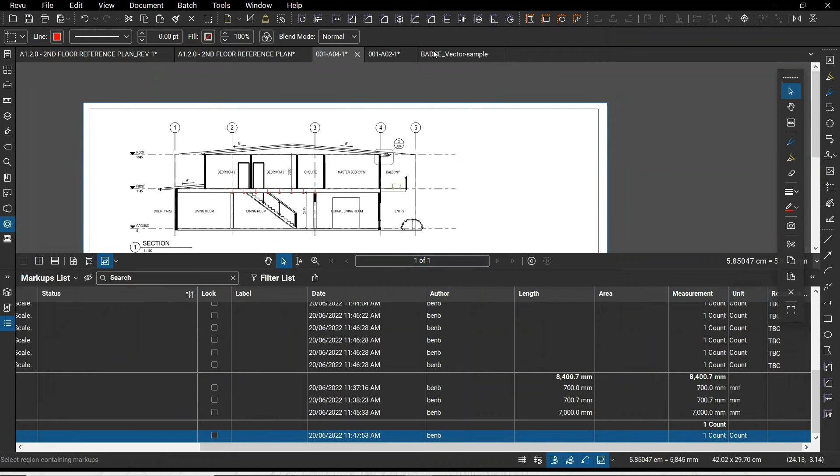So you can see here, if I went to this one, you can see how it's got all these quantities, all these area measurements, count measurements, length measurements, etc. Funnily enough, all created by me again, and all with different lengths, area measurements, etc.

Now, to manage this markup list, I can go to columns. I can add on additional metadata or even create new formulas, which I won't be doing today if we're going to be a bit tight on time.

I can change the order, so I can select, I'll bring on maybe the width as well. You can see how that goes in here. And I can simply even drag these around to a different position, so I can have width in front of length, etc.

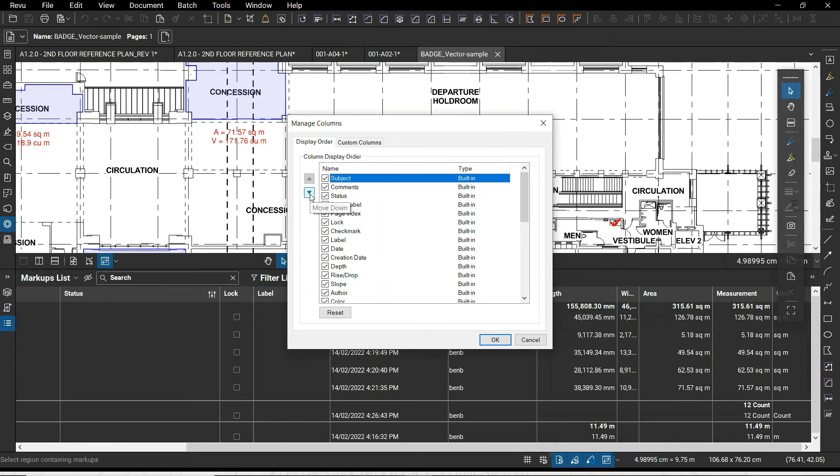Or area - I can do that through the markups list as well. I can go to columns and go to manage those columns. And again, you can see I've got these arrows here, so whatever I selected, I could move up or down accordingly, which would change the order that they go into.

I can filter this list by going to filter, and then I can choose what I want to filter them by. Let's say I just want to get the area measurements, for instance. The giveaway with filtering the lists is that when you hit it, it will go orange. I can then say, well, I only want to really get the area measurements. So I can select area measurement, all the options I've got here, and it will give me just those areas.

You can see how it's actually grayed out the other markups, so those counts have disappeared. Or if I do the counts, you can see how it's grayed out those areas. Let's say, yep, I just wanted the areas - let's get rid of the counts.

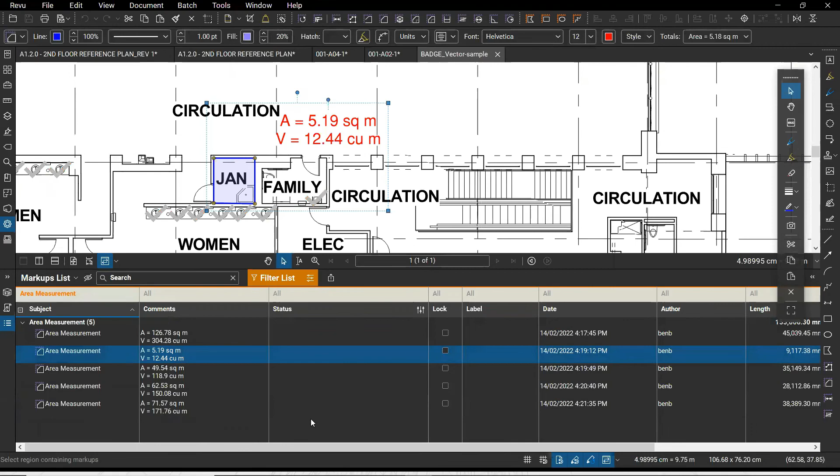And then I can choose to export that - so I can export these areas, export that or get a summary of that. One thing I like to do if you're trying to utilize Excel as well is you can export it as a CSV summary. So you can export it.

Then, because I've got those area measurements, you can see here that it's straight away taking the area measurement. I can choose which columns I want to take. I probably don't want to take all the labels and locks and all that, so what I'll probably do is clear all of those and just take my measurement and the unit as well, so I can get that measurement and maybe get the unit as well.

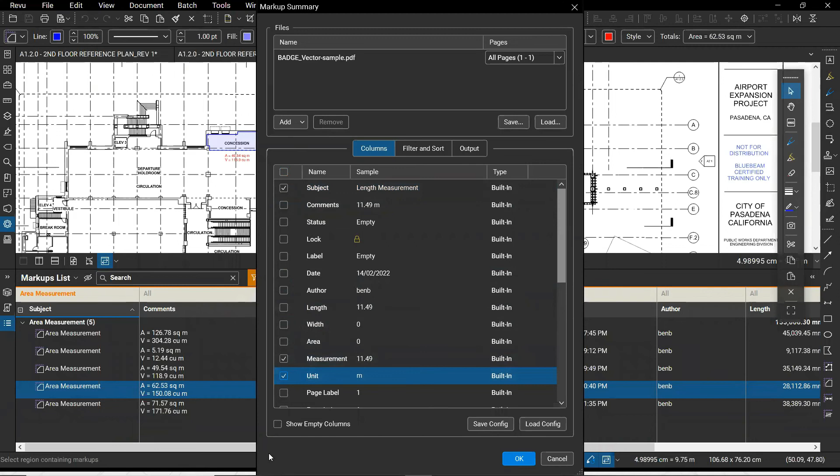Choose where I want to output it to. So I'm going to output it to a location somewhere, and I might even get it to open that file afterwards.

Probably don't need this one, that's probably a bit superfluous. And there we go - so that's how quickly to export or create that summary.

I can create it as a PDF report as well, which will actually hyperlink that. So if I did export it and create it as a PDF summary, I can append it to the title as well - append and hyperlink to my current PDF and hit OK.

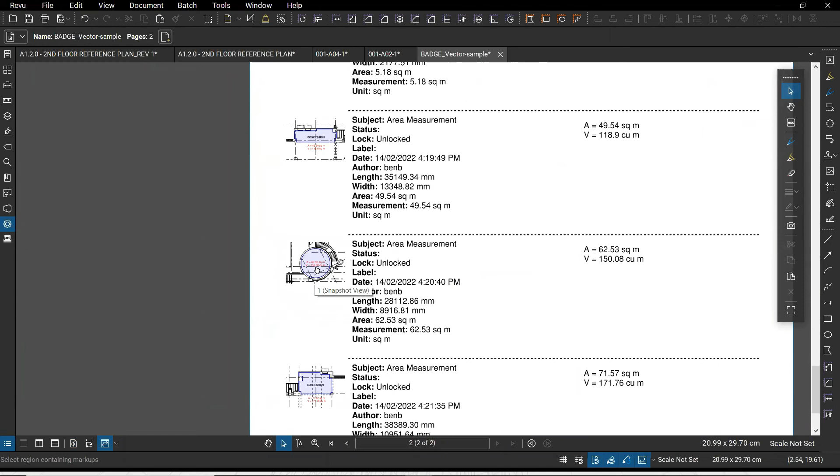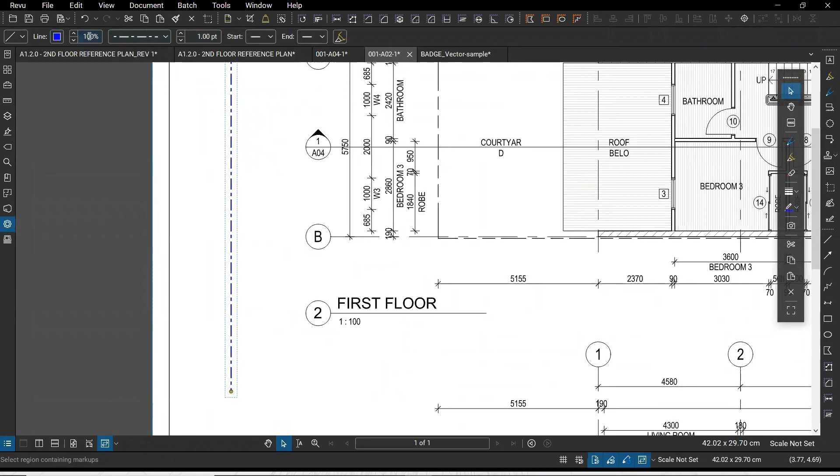I'm not so worried about the actual sketch to scale, so I'm just going to draw a straight line, in blue so it stands out better. And yes, you would probably want your center line, so it looks like a grid line as such. You may want to change that - yep, so I'm pretty happy with that.

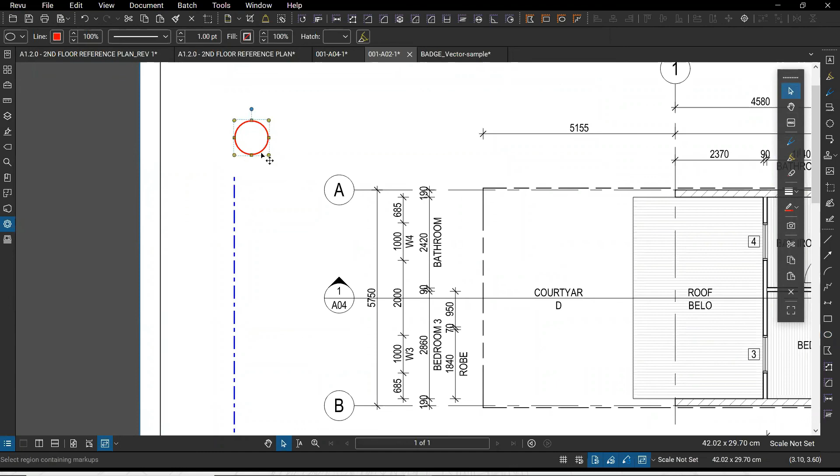I would do a circle on top of it, and just select a point. You can see, funnily enough, it always wants to draw an ellipse. If you hold shift down, you can overrule it to actually be a circle. Bring that in, put it at the end, and you can move that exactly onto that point.

I'll just put a text box in front. Now you can actually put in a circular text box - you can put a shape on it and get a circular one which will go around it. Sometimes I find that a little tricky because it's trying to do it too big. You can still auto size it to suit and get it in the middle, but I would prefer to just put the text box in without that boundary, get the simple A, and then paste that in.

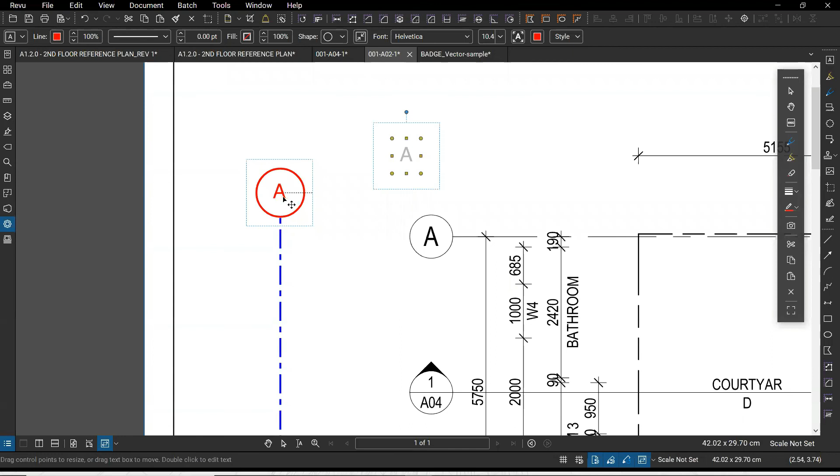You could put it in and distribute them vertically. So once I've got that, you can nudge even just by using your arrows. Once you're happy with that, select it all, and I would create a group. Then you can copy that across, hold your shift down and copy that grid across.

You can select those three by holding shift to add. I do have them pretty well equal, to be honest - you can tell I'm a drafty by trade. Let's make it obviously not equal.

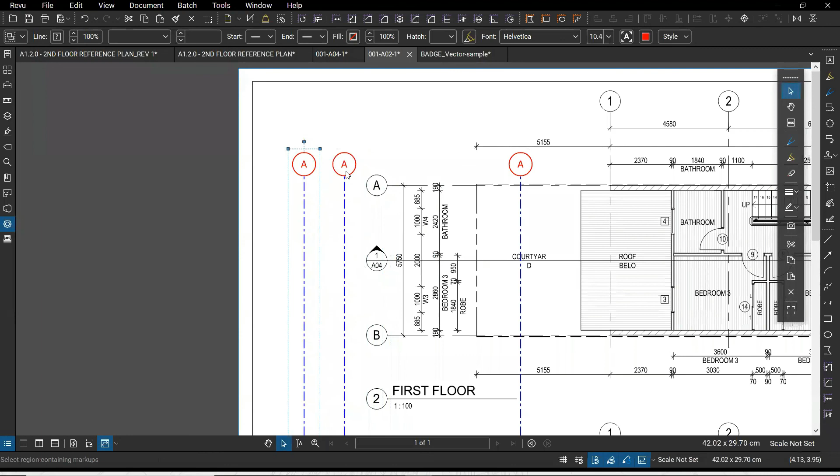Select all of them again, and I could distribute them horizontally. Then if you want to go to B's and C's, etc., you would have to select it and ungroup it, explode it, and then come in and manually change that. That's one of the things you sort of wouldn't be able to get around, but you're obviously going to have to rename them at some stage. So that would be the quickest way to do it.

If you did want to get those accurate distances between them, I would use this polyline sketch to scale to give me that actual - I'd need to set a scale, etc. But that way you could get the exact distance between the grids and copy between those points.